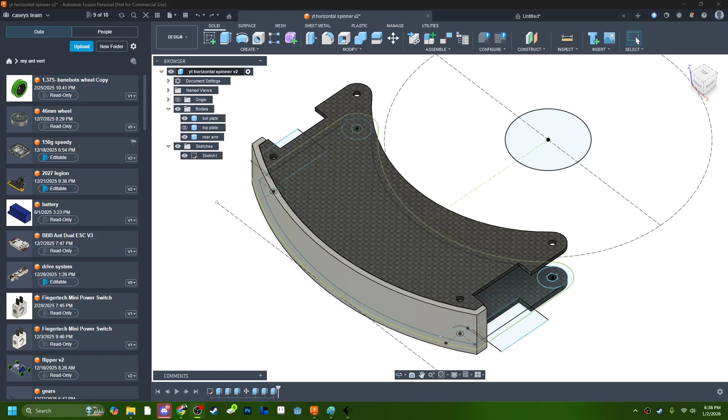Alright, welcome back to Let's Build a Combat Robot Part 2, where we're going to do the horizontal spinner, and this time we're going to go ahead and do some stuff.

So I've gone ahead and gotten this right here, this 2207 hub motor, which comes from Repeat Robotics, and one of their weapon blades, the 6-inch weapon blade. Got that CAD inserted, and we can have some fun with this.

So we're going to go ahead and spin this down. You could do multiple things with this, so I'm going to give you multiple options in case you want to change yours. We're going to go ahead and put it in, see how it meets the circle up nice. But I think it's a little beyond the edge. No, it's perfectly right on that circle.

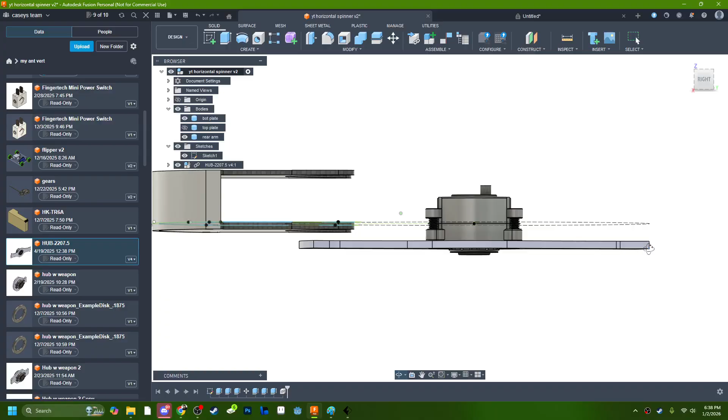What you'll notice here is that from here to here is 25 millimeters, and we can affect the very top, very bottom. 24.4, yeah, it's 25 millimeters. We built a 20 millimeter.

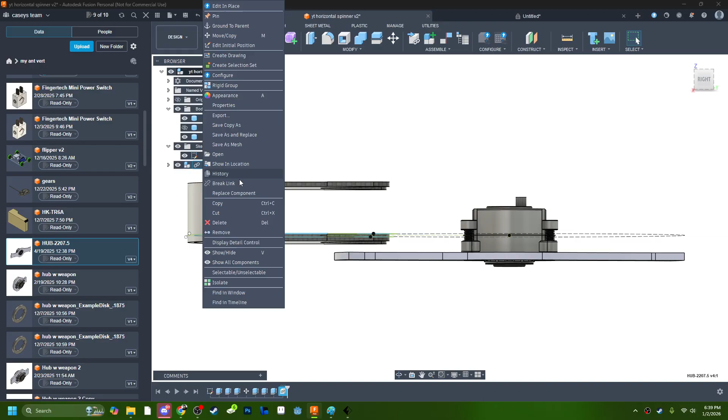So what you can do with this, we're going to go ahead and break the link, or unground parent, break the link. I will explain what that is one day, just not today. And you can try to center this.

See, I've got the other weapon discs. Go ahead and hit OK. I'm going to remove these other weapon discs. Now, we're not deleting, we're removing, which you want to do after you break all the links.

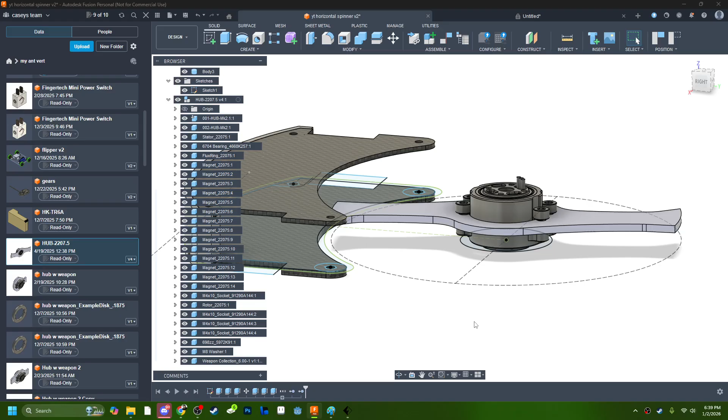So this is where it would sit, which would put it like 2.5 millimeters. So there's 5 extra millimeters for plate, which means the top of this is aligned with the top of this plate, and the bottom of this is aligned with the bottom of this.

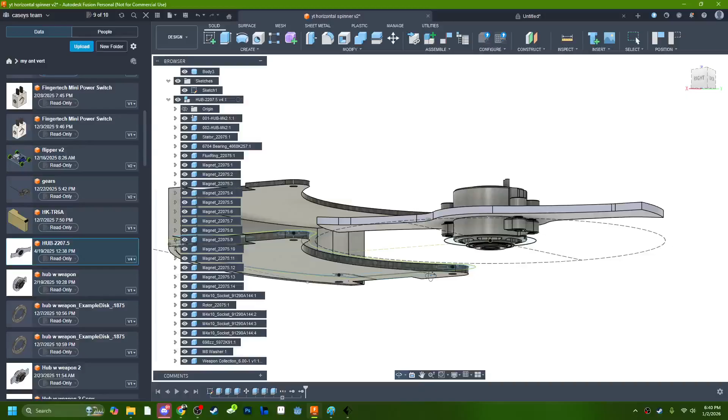So what we could do, we could make this taller, or we could maybe change it. That's always a possibility. We could change this. And what we could do is do something really fucking nutty.

Which you could just build these plates, build the bottom in the same height, and build a top bracket that fits over it. You could do a bunch of things like that, where you would just take this sketch, project it, get your bolt holes and get everything all lined up.

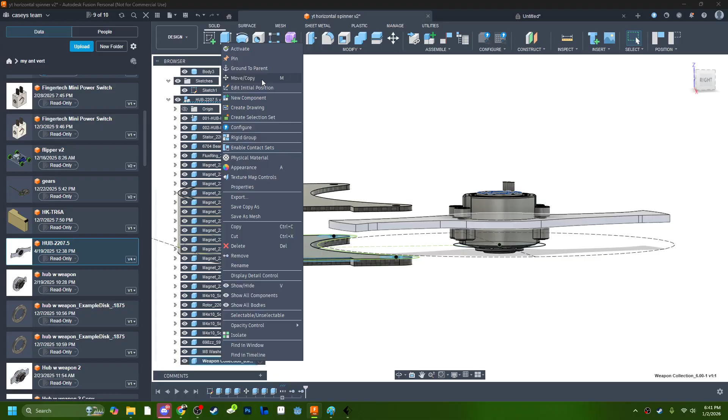Or we could radically change the whole design, which I think is what we're going to do. We're going to take this weapon blade, move it down to the bottom. Because this whole thing is 5 millimeters taller.

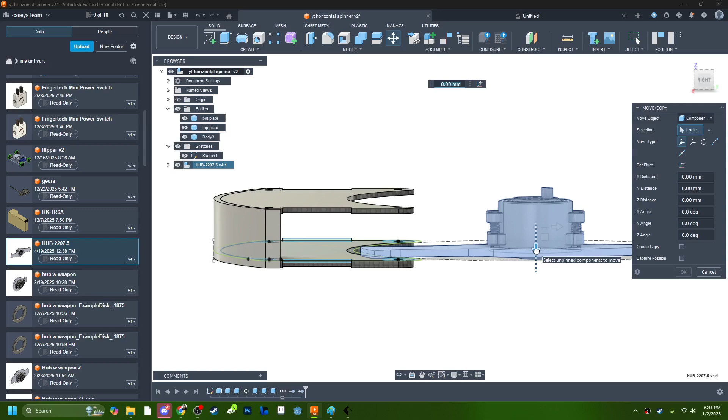So we're going to go ahead and collapse this. Take this whole motor, we're going to move it. We're going to go ahead and move it the extra 5 millimeters down. Now our weapon blade, I think, is in the bottom of our robot. Could be good, could be bad.

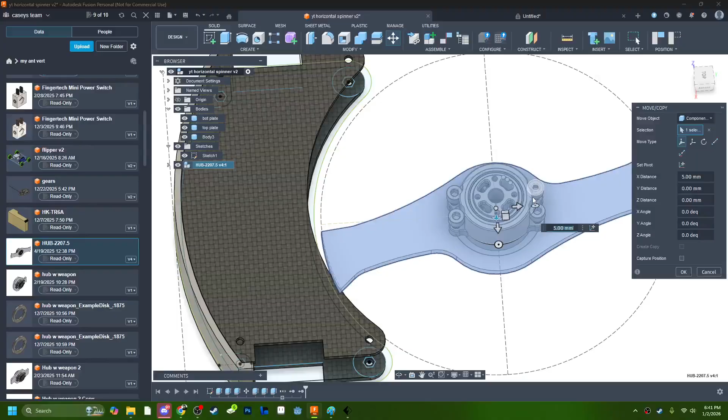But effectively that means all of this space up here we need, and it could potentially shoot it in. That's right in the corner. So that would be about as far in as we might hit the... maybe we could scoot it a little more.

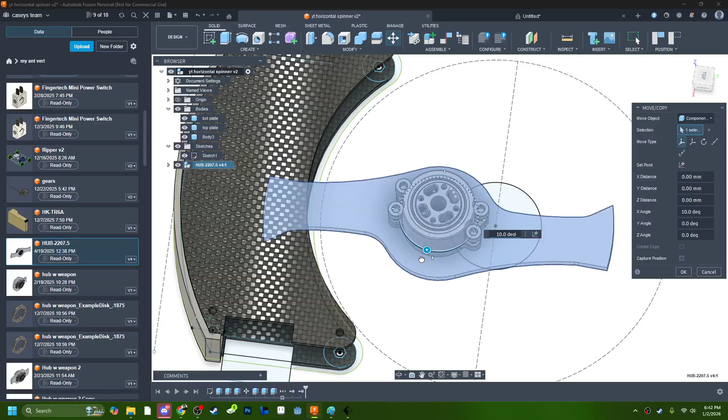Still not hitting anything. So the more we can do this... I don't think—oh yeah, it's gonna miss the wheel entirely. So we could build this nasty fucking spinner, nasty undercut. We could move this all the way in.

Oh yeah, we could. Now, the farther you move it in, you'll see that the reason you would leave this out is all of this offensive area—scoot it in, this is covering up a lot of your... But we could probably go all the way into like here.

Look at that. Let's see, that cuts into the tire. No, we don't want that. Bonk, bonk. Still cutting into the tire. Bonk. Barely clipping it, so we'll move it out 5 more.

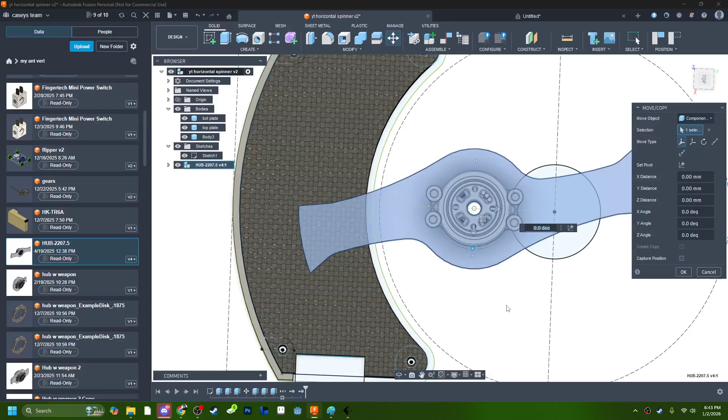Good, put it here. Yeah, we'd want a little bit of wiggle room. So another 1, maybe 2 millimeters down. Now we get this vicious undercutter underneath our robot.

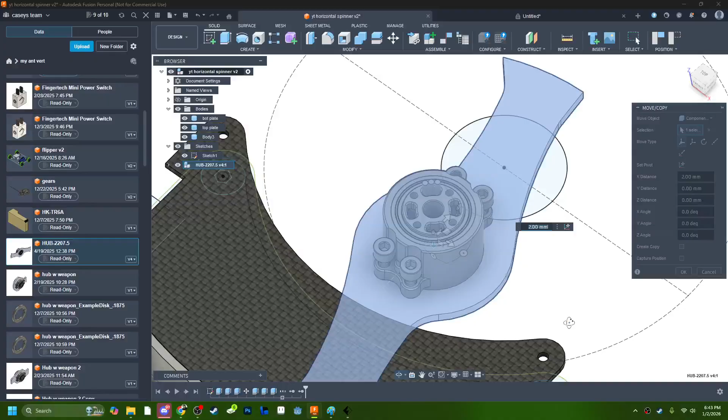I love how designs can be completely remade. So I want everybody's opinion because we'll go ahead and do this, and we'll fix this weapon next episode.

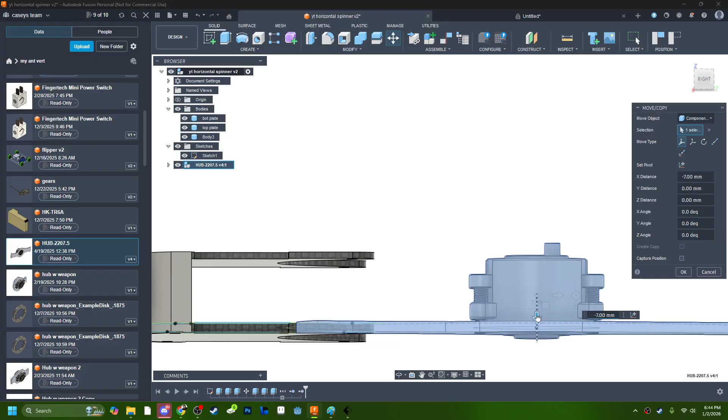But do we want to make this a mean undercutter, or do we want to go ahead and put this back and turn this into a traditional horizontal spin? We could do that—really, no reason why we can't. Still do an undercutter. We could put it back in the middle and still do a...

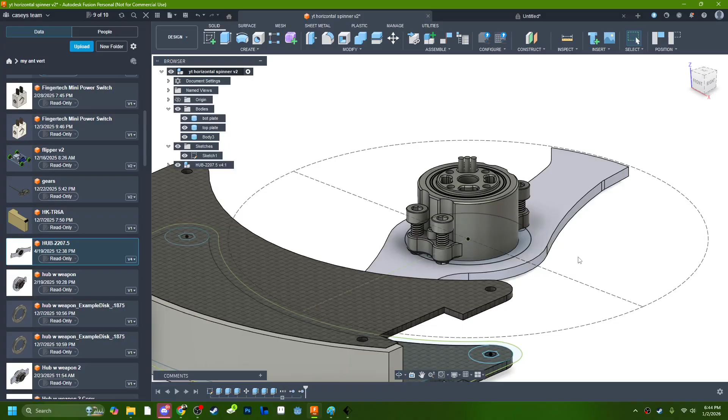So, you guys decide the design: do we want this far out like we are doing, or should, in the next episode, we scoot it back and do a real short, compact under... Alright, now that that's in there, let's start dealing with the far more important problem.

Alright, and we're going to save this front armor for when we do this.

Now, also, for those who are asking, the top plate, you'll notice that we put these hexagons in, but round circles in the bottom. That's because this is going to be TPU, and TPU doesn't really grab on this. But if you go into like Amazon...

you can get these spacers right here, called standoffs. Do M3 by 20 standoff on Amazon, and these are nylon ones. I think you can get them in aluminum or whatever else, but what they are is basically you can build it - bolt your plate to the top, bolt your plate to the bottom, and because it's that hexagon shape, it'll hold on to the TPU without you having to thread anything. So that's why I use those, for those who want to know why I'm sandwiching between plates.

It makes TPU easy. Anyways, let's go ahead, now that we've inserted that, we'll play with that later. We gotta make some wheels. It's all fun and games.

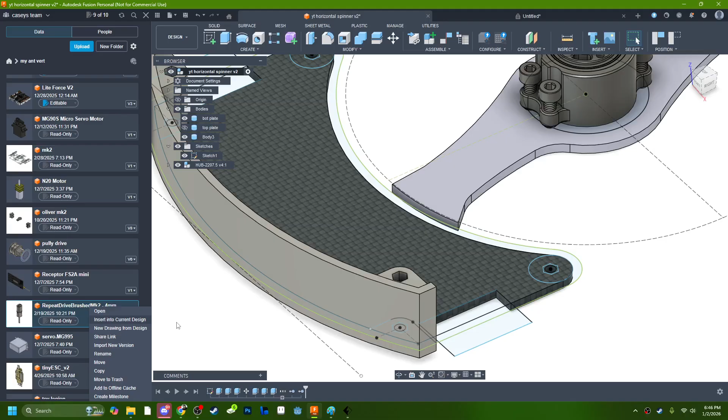And I've decided on these Repeat Robotics brushed MK2. Okay, so we're gonna go ahead and up like this. I like to spin them straight up and down, right? And we'll get that roughly centered.

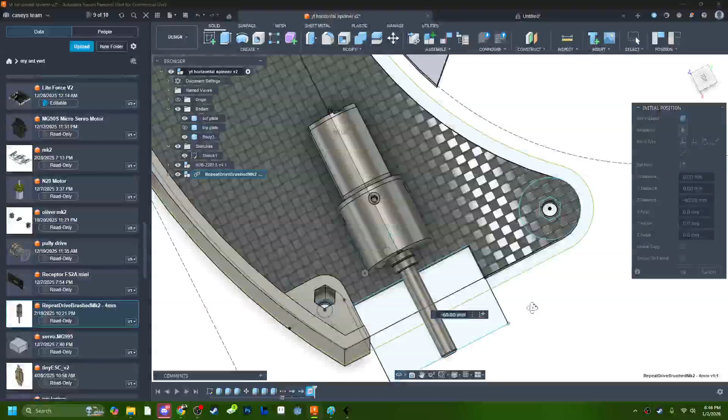That's not a very big wheel. We might end up bringing it all the way out. So, you know, it sits very nice on that very edge. We might end up making it bigger. It is what it is.

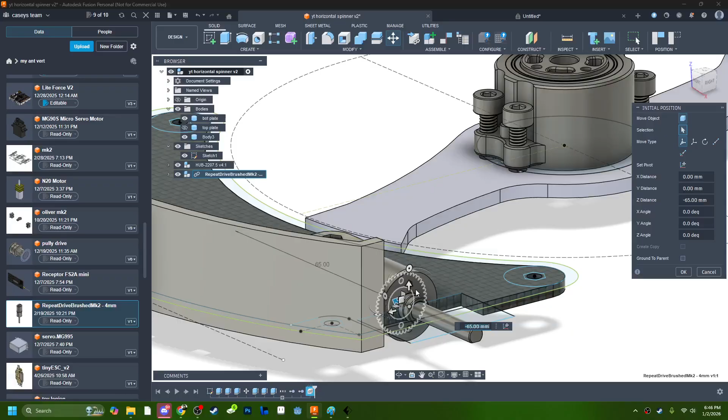Especially if we're going to do a vicious undercutter, we'll do it.

Let's put the top plate on. Let's get this roughly centered. We're happy with it. It's a little high. Put a little low, put a little extra tire towards the bottom. Or, yeah, you know what, that works. Alright, so we've got one in here.

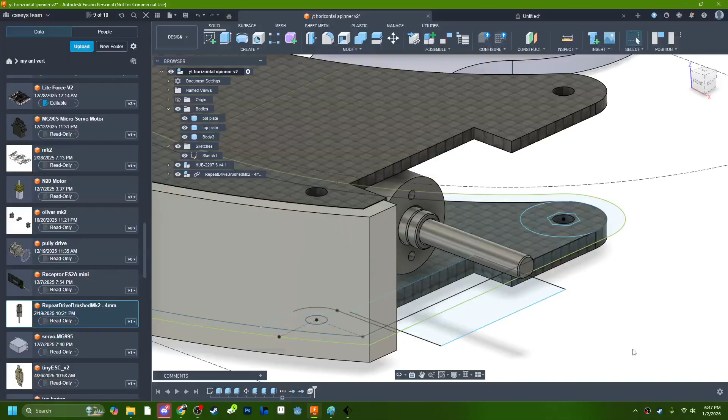And we're going to grab and insert another one.

And this is where we're going to start the motor mounts. I'm going to take this - take the center of this pin, line it up to the center of that pin. Remove.

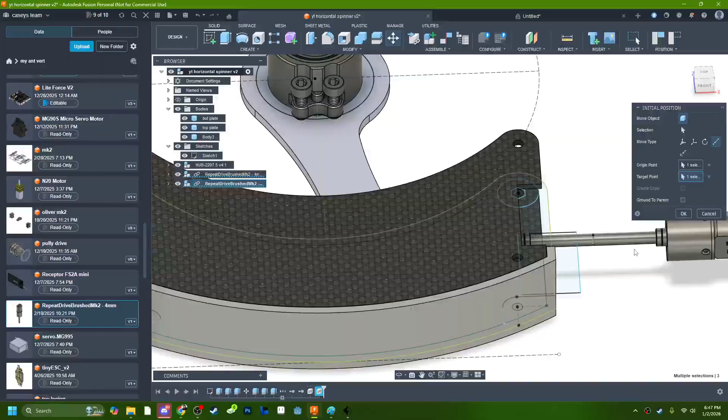Throw it over on the other side. Go from the top, because if you remember from the top, it's just barely poking out, just like that. So they should be roughly exactly the same, and that's where your motors are going to be.

Now, let's do the difficult part of how we're going to attach these. We have a couple options. One, we could permanently fuse them into the front armor. Or two, we could do another standalone thing with a couple standoffs to just hold it in place. I'm probably going to take option 2.

So what I'm going to do is we're going to go ahead and make the top plate invisible. We're going to rename body 3 to rear armor - rear arm, it's just my abbreviation for armor. You want to make sure your sketches, you want to keep renaming them.

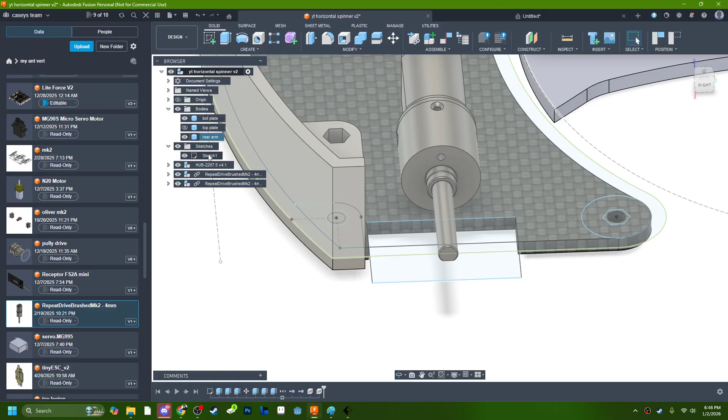Sketch, main sketch. And you want to try to minimize the number of new sketches. So we're going to go ahead and sketch, project, capture. Alright, so this is where we're at. Okay.

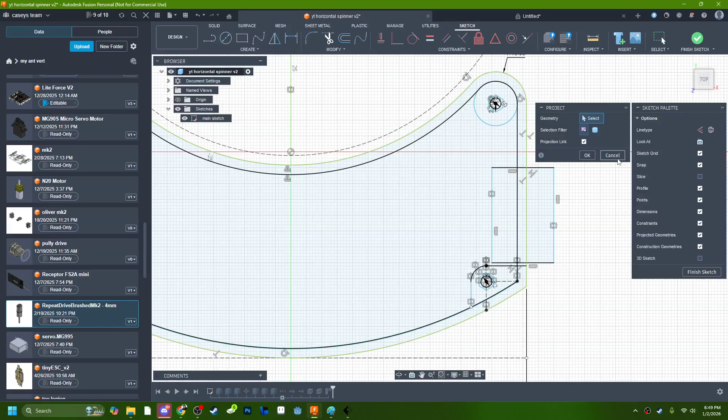Cancel. Get rid of this sketch here. We're going to make another one. Sketch, project. This. Yeah, okay.

And right here we get this middle point. It's going to come out 18, 19, 20 millimeters. That sounds pretty good.

We don't need to make the whole thing at once. We can do just little portions of it. And I'm going to do just this little portion for now.

Because what we can do is take this, bonk, go to create, here, on this axis here, and press X to turn that into a thing. Now we've got one big old chunk of stuff. Okay.

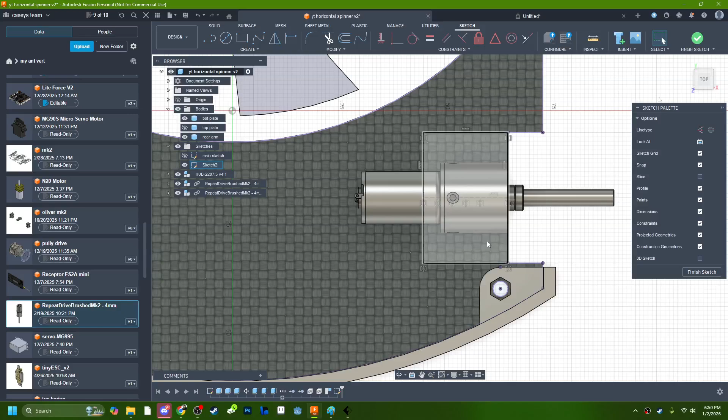Now we're going to go ahead, we're going to take that one chunk, extrude, offset 0.1 so that it's not actually touching the bottom. We're 20 millimeters tall, so we're going to go for 20 millimeters, but we're going to make our motors disappear so we don't accidentally cut into a new body.

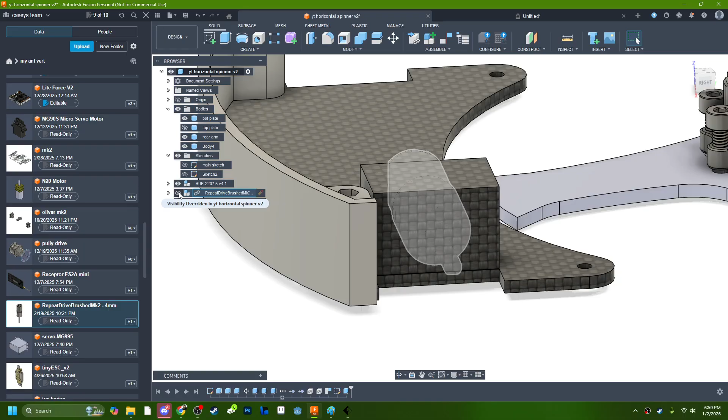Now when we put our motor back, you'll see we're pretty good size facing in here, a few millimeters back into it, right?

Now we're going to take this new body, make it invisible, grab this, sketch, project it.

Now if we make our motor invisible again, we have this great circular pattern. We'll set the outside of that offset 0.15, make it slightly bigger.

Side one. Construction line, because we really don't need it. Now we can select the whole thing. These are going to be construction lines for now, because we don't really need them.

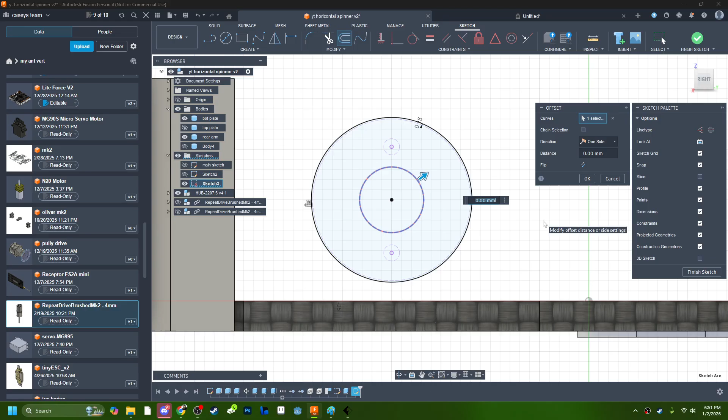So they're there as a reference. Here, we're going to offset of 0.5, which gives us plenty of room. And now we're just going to select that. Finish. We're going to bring our new item back in, our body.

Whole thing is 20. Say 1, or 5. We'll see how 5 millimeters.

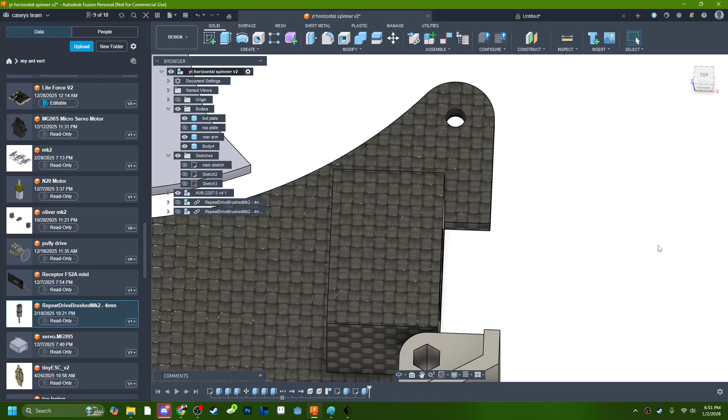Okay, so we're going to take our motor, bring it back, right click, move it, put it way out here so that we can do something. We're going to grab this circle right here, line it up with this circle.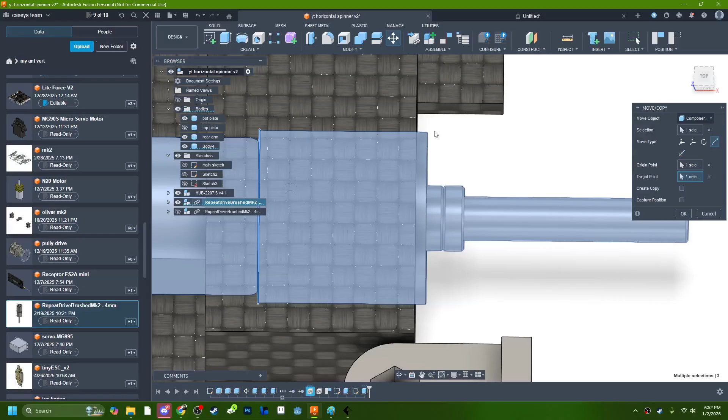See, well, we're like a millimeter off, right? We got like another millimeter, in we go. This is how I get things roughly lined. Take that, minus 1.

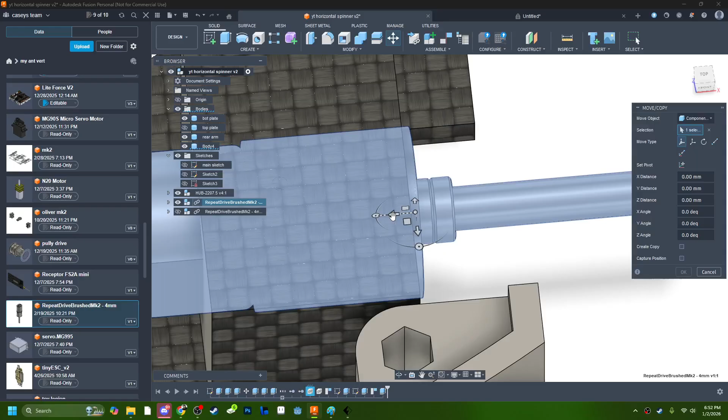Turn our motor back on again. Circle. Line it up with our circle on the side. That looks pretty darn flush to me. Alright.

Now that looks really good, make it invisible. Take our back, extrude it. Another minus 0.15 for a little bit of wiggle room. Alright, and then we're going to turn our thing back on.

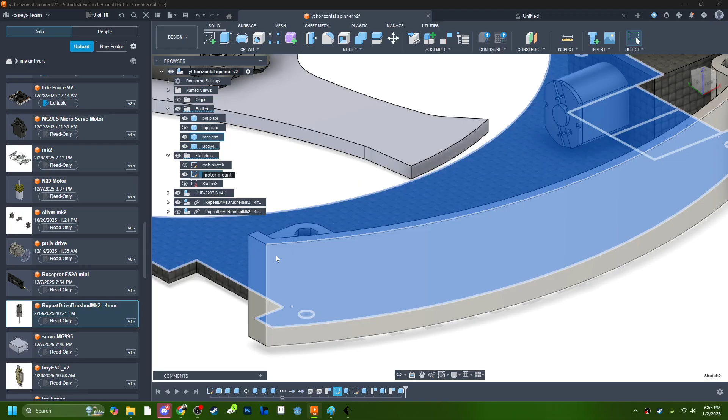Now this sketch here, okay yeah, this was motor mount. Motor mount vertical. This is our motor mount horizontal. Motor mount horizontal. Okay.

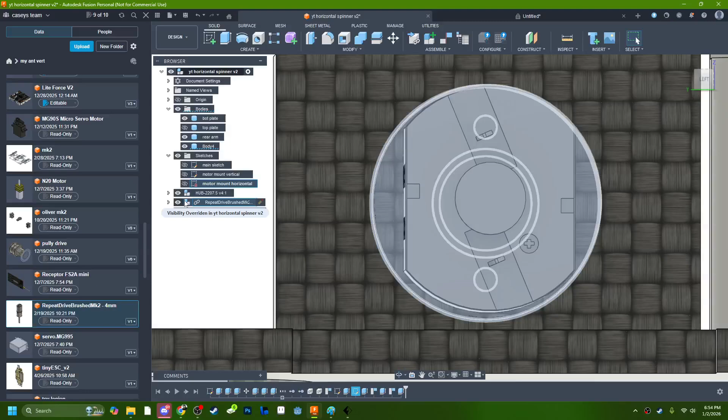So very, very good. So make this disappear. I'm going to go to the back. We're going to right click, project. We grab all of this, click on all this stuff.

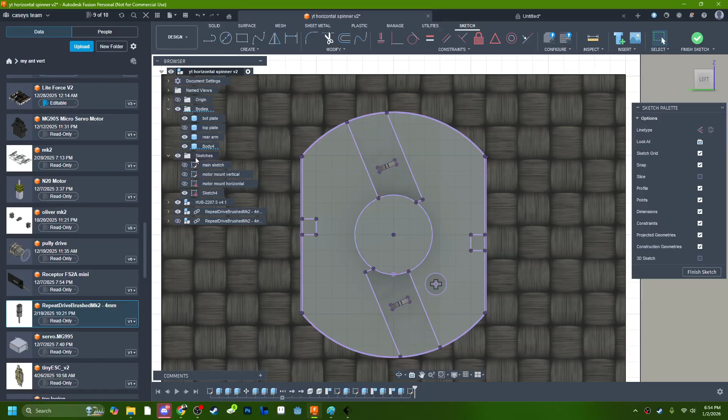Should be a little teeny tiny lip. Yep. Okay. Here. X, so it's all construction line. Here.

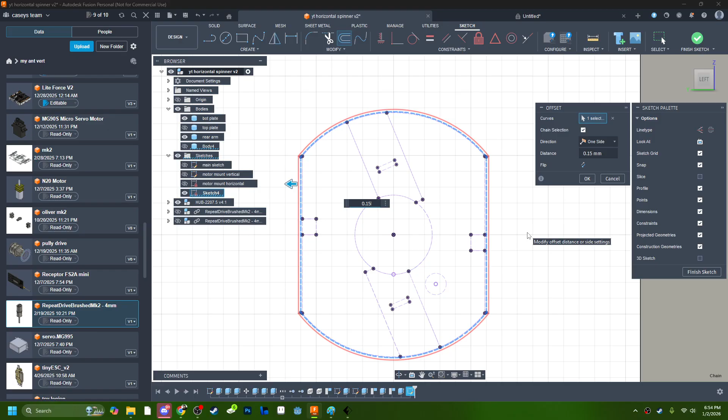Our offset, very far outside. We'll change select, see if it'll let us. Yep, here's the outside. We're going to go 0.15 away from outside in all directions. Because we turned them all into construction line, click on the whole thing. Our body back.

Let's extrude it right through the middle. Bonk. Now we'll have this nice little cradle in the back that will grab onto the motor. Do so quite well.

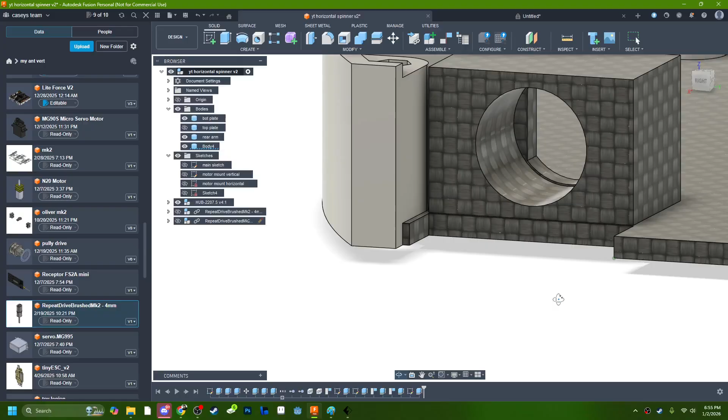Then we're going to come off the face of this. I'm going to come off another 3 millimeters. Okay.

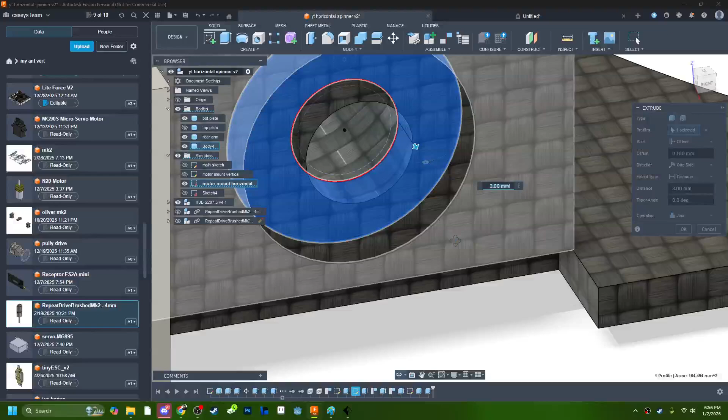Or what you can do, leave this just a little tiny tip so that it has something to rub against, reducing the friction, you're not running against. Really, it's a dealer's choice. I'm going to go to one side, distance extend type, to object right to this, make it.

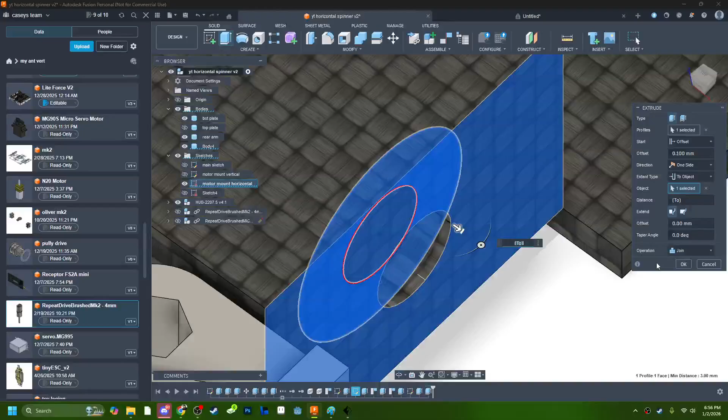Right now, our motor has this little home it fits in. I'm going to right click on our new physical material, set that into thermoplastic resin.

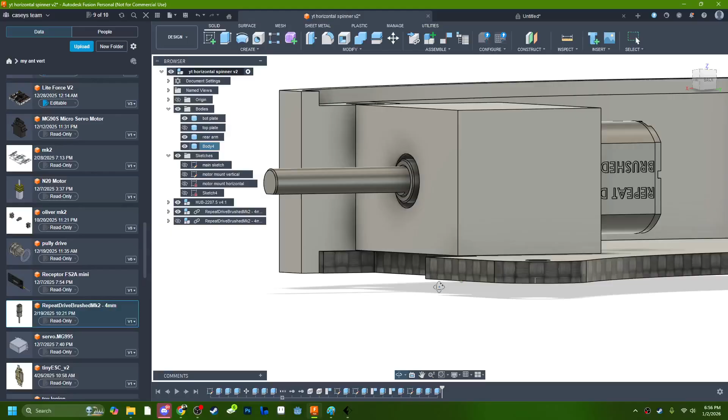And right now it's just this great big old heavy block. But it does what we need it to do, right? It's in there, it's all shock mounted, and should be able to absorb a couple hits. And I haven't decided on whether I would have bolted it there or move it out, but that's where it's going to sit for now.

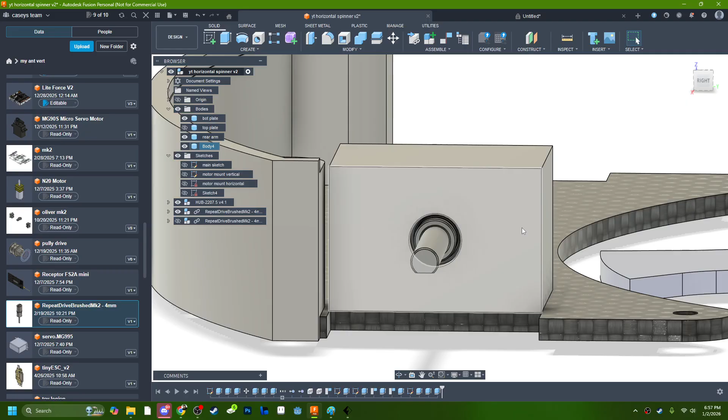Now, how do you get your motor in and out? Well, I'm a big fan of, you do one of two. One, chop this top half off, attach zip ties. Right? Two, you take one of these standoffs, put it like here and here, one on either side, and then when you bolt the whole thing together, it just holds it in place.

So we're going to go ahead and split this in half, make it visible. Back to our horizontal motor mount. Disappear. Or you know what, we're gonna just make a new one.

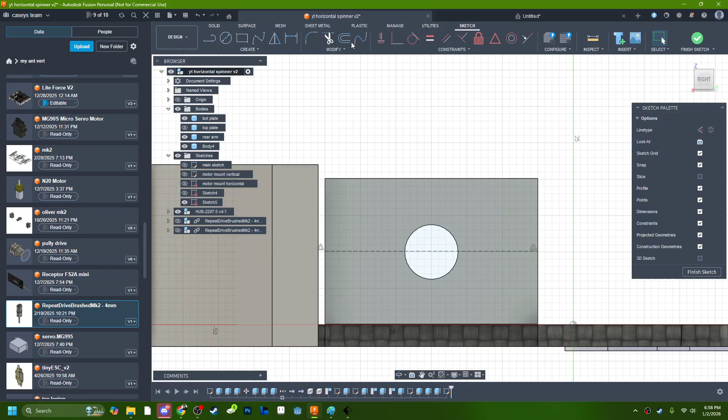Body, sketch, line. That centered? Oh, it is, perfectly. Look at us, we did good. Alright, so we're going to take this line, right in the middle, press X, turn it into a construction line, click on it.

You're symmetrical off both sides, and off both sides I'm going to take off 0.1. Now we get this perfect little line splitting it in half. Grab it.

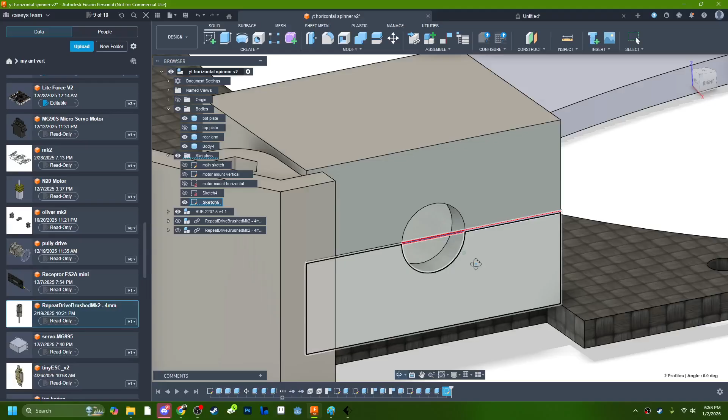Alright, we're going to take this bad mammer jammer, like this up. Put it right in two. Our motor mount. Now

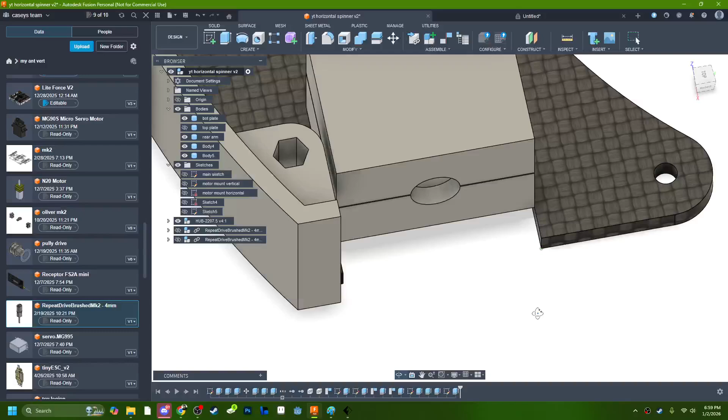that we've got that, we want to attach it. How can we come to this back? Even though that's like where the big chunk... cancel.

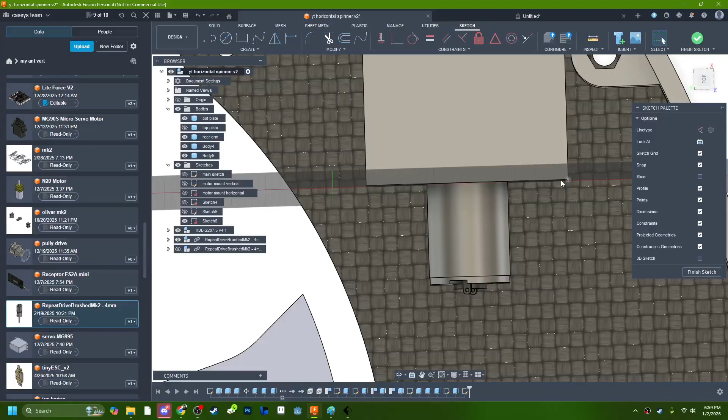sketch right into the top of it. Here's about roughly 9mm. 9 out, cross back. Line. 9 out, cross back.

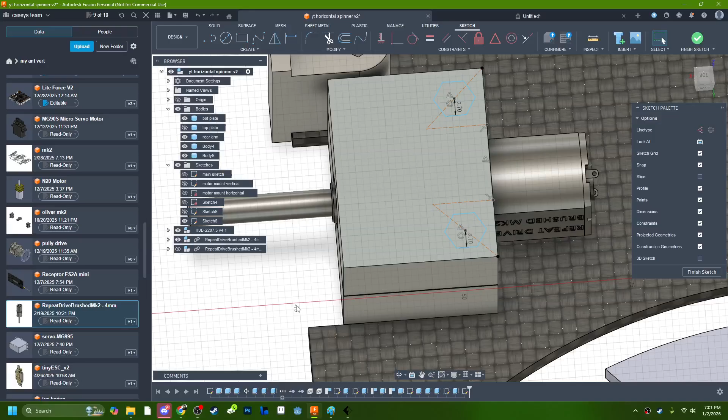Now, these distances may change. Another thing you can do is use a constant value. At another time, you can make a value that's a word, like standoffs. Then you go into every one of these standoffs and type the word standoff, and it'll change to whatever that value is. Change it later, and it'll update automatically. Okay, so that's where those two are going to be.

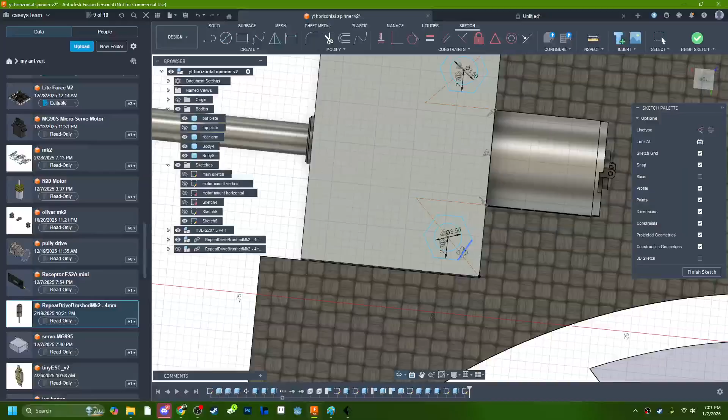We won't even fill it. We're going to take a circle, perfectly co-aligned. Make sure that this is a separate piece. It connects to the side. Sometimes if you're off by a little.

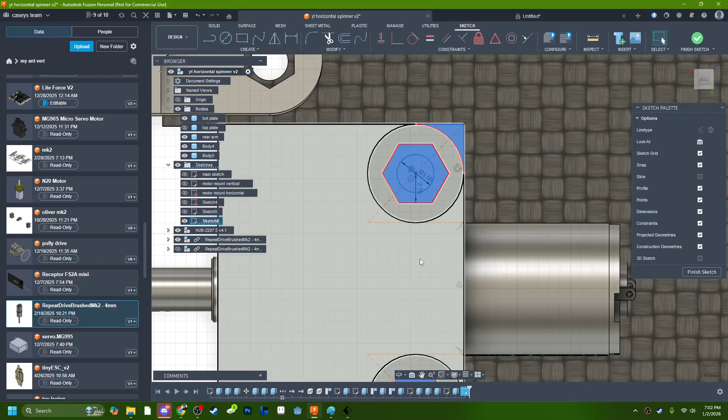Good, great little motor mount. Now again, we're going to trim the fat off of this, because right now it's pretty bulky. Probably don't need nearly that much, but it's there. All right, we're going to go ahead and sketch.

We're going to turn the top plate back. Top, cut that hole in. Bottom. There's our bolt hole.

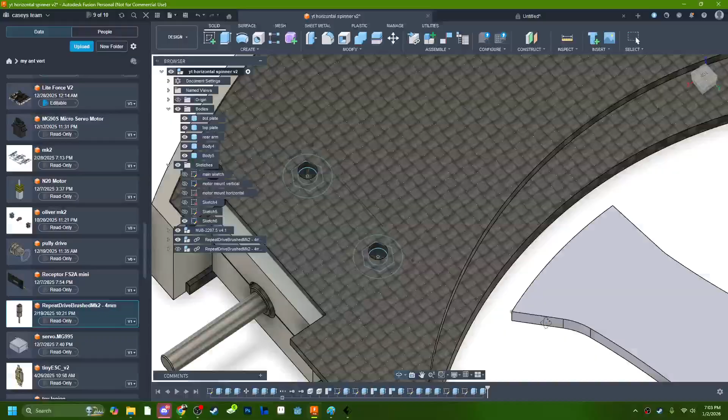We're going to create this. Two. Mirror plane.

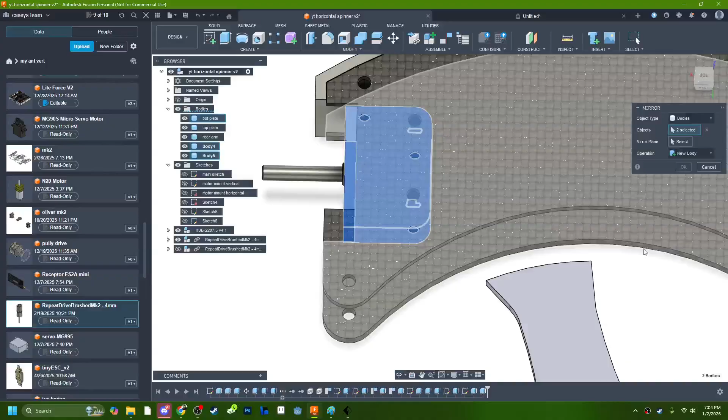Now we've got both sides made. Now we'll have to repunch in some holes on this side.

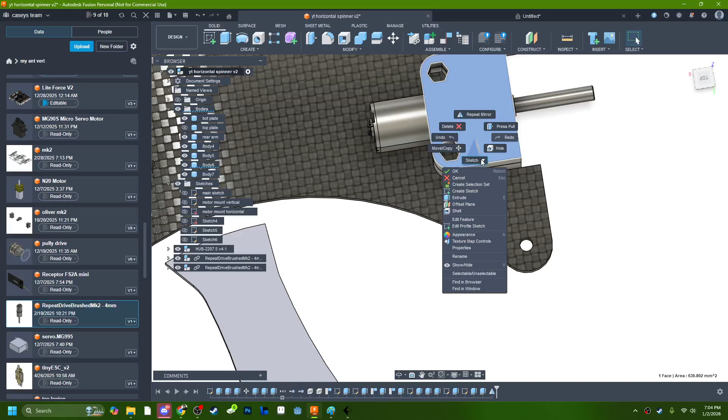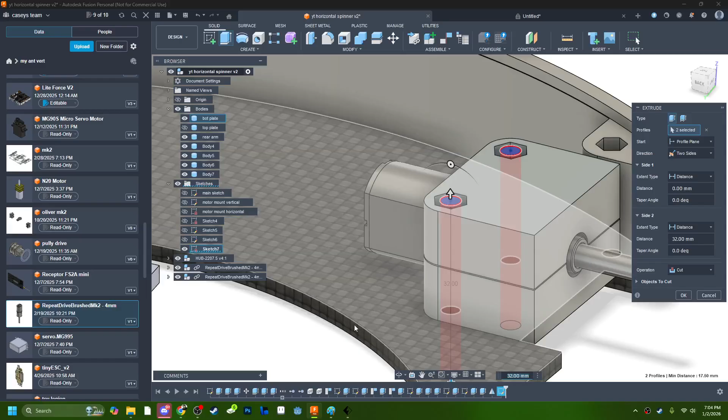Alright, and at this point, theoretically, you've got 2 motor mounts. And that's not doing too shabby. So, at this point in time, that's a functioning piece.

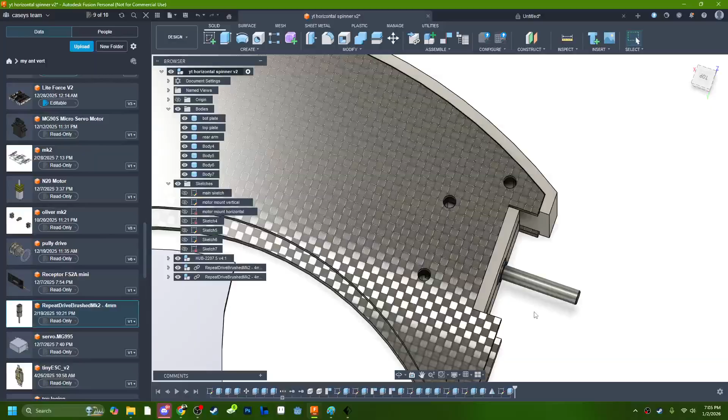May shoot this farther out, farther in. We're going to decide next episode because you guys need to figure out whether we are going to put this as your standard horizontal spinner. Because I can also...

Assemblies. We can take this weapon. Okay, we can turn this back into your stereotypical horizontal, roughly in the middle. It'll be slightly lower than that, slightly below the middle. That's fine.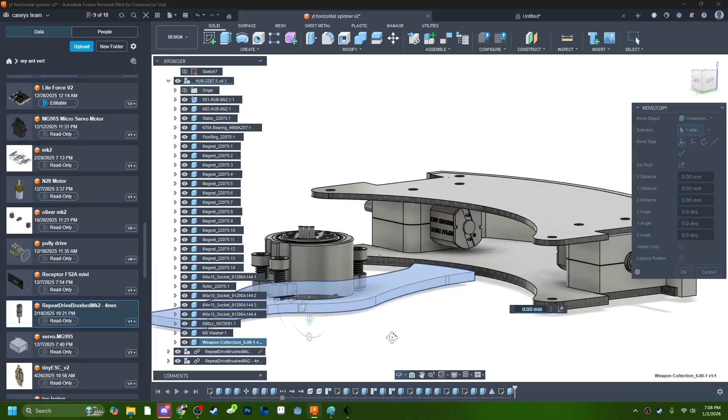We can build it undercutter out here. Or we can grab this, drop it a few millimeters, bring this in. It was pretty far.

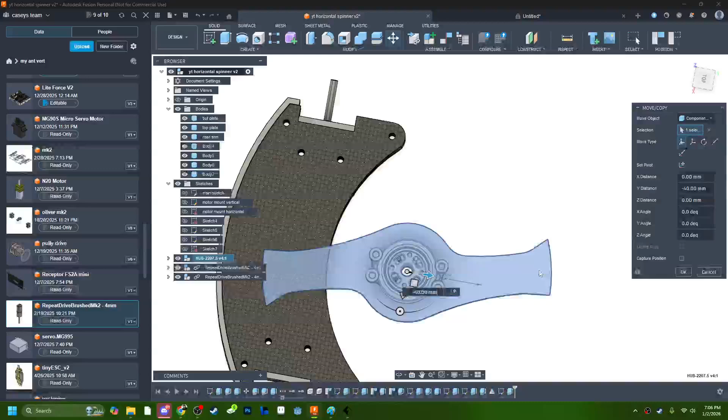We got... we're far in, can I? So about as far in as I can get. Not catching.

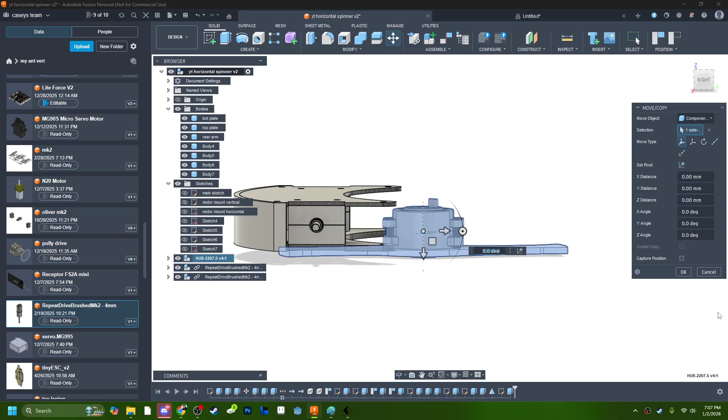Or we could turn this into like a real short, stubby undercutter. Which one do we want to see? Next episode, we will turn it into whichever kind of horizontal we want.

Alright, again, if you wanted standoffs, they're right here. If we go to Repeat Robotics, Repeat Robotics. Alright, you can see right here is the weapon blade we're using. Here's the hub motor we're using. It's like right on the front.

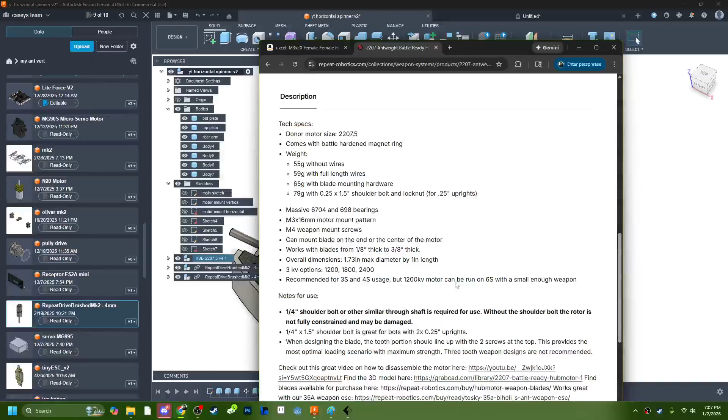So we'll click on this. It's the 2207 ant weight, right? This is what we're currently using, and roll down. Here's find a 3D model here, a GrabCAD, battle-ready hub motor.

Down here, the 2207 ant weight also gets that beetle weight option. The 8-inch only works on the beetle weight. The 6-inch only works on that beetle. Wait, we can get that 6-inch on the ant weight now?

Oh, that's no, it's only $13. That's terrifying. Sure. Okay.

Gonna learn something. All right, we're gonna go ahead and put this video off with a bang by checking collections.

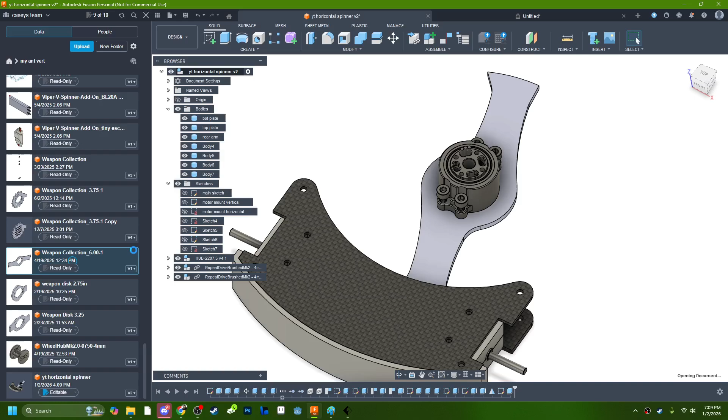The one in here? There's only the one. Where is the one with all of them? I have somewhere in here, I have the whole weapon collection. Here we go.

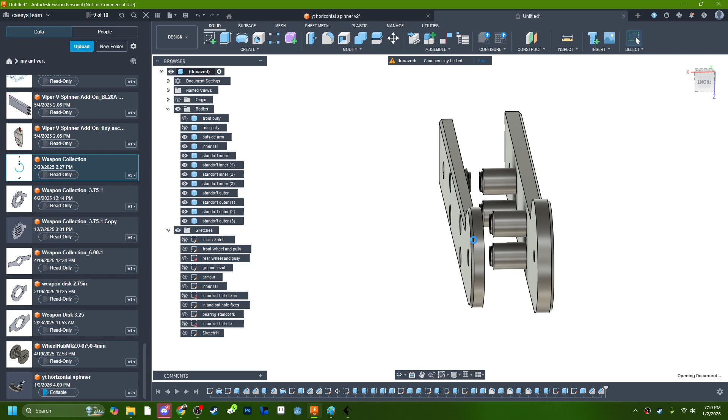Alright, we're gonna learn something now. Another 6-inch - is it a new 6-inch blade? But here it says it's a 5-inch. Assuming that's going to be roughly the same. On there, they're saying it's 6. I don't know if they changed it.

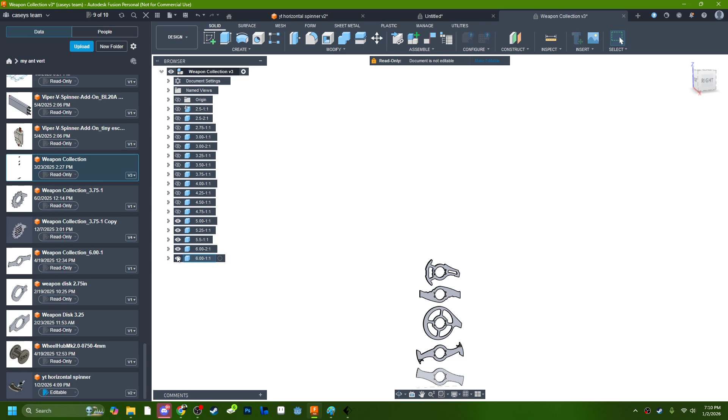I'm going to save. Take this item from here. Save a copy. Weapons collect 5, okay.

And maybe we make this thing a big, huge, scary undercutter. And we're going to insert this current design. And at the same...

Fits rather well, actually. There. Oh, and it's thick and chunky.

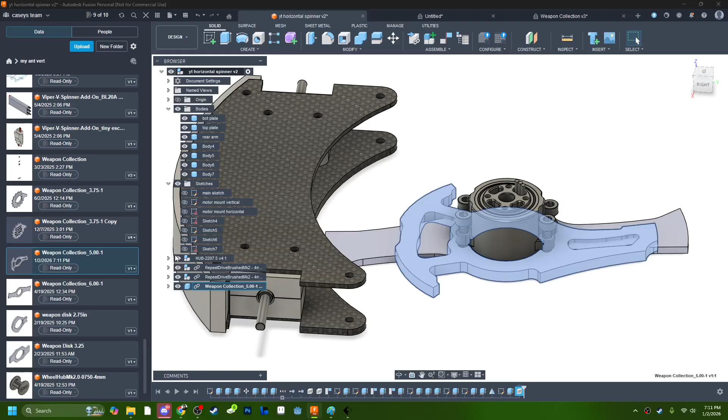Alright, we're gonna go in here. Well, you know what, we'll teach you how to do that next episode, where we attach the two together. That's... big and chunky. Off by a little bit.

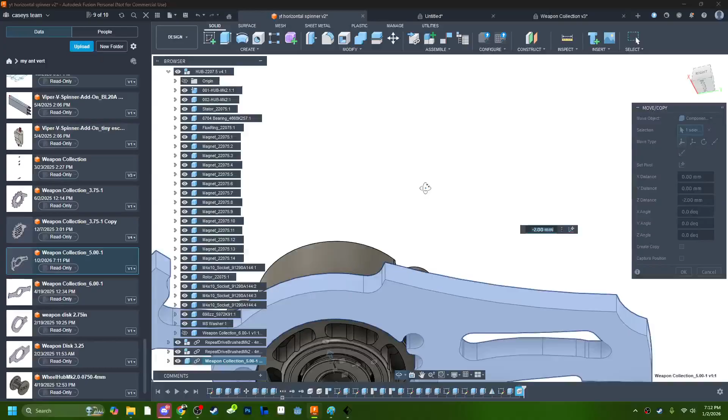That's terrifying. If it really is 5 inches, then we can use that for all sorts of other things. Not too bad. Oh, we've gone way over our time limit.

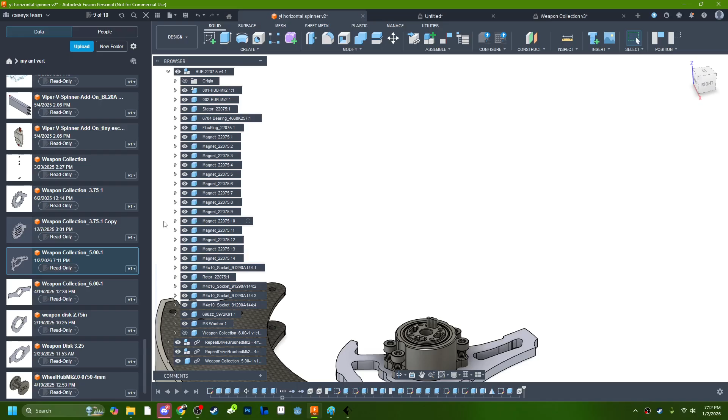Press OK. And sometimes it's good to check the store. Look at that, now we're moving up in the world. Now, I did make it smaller.

We are going to build it with the 6-inch blade, which I already currently have in front of me. But I definitely want to order one of these funsies because, yeah.